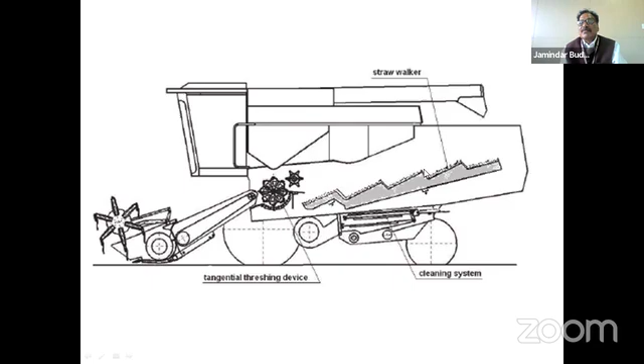And here we find also a winnowing system, that is the fan. It can blow the air and the light particles will fall down. And of course the straw, via straw walkers, will come down. It is the basic function of the straw walker when we see it.

And you see the losses in a combine harvester. The combine harvester mainly shows losses at the cutter bar. The cutter bar losses can be through shattering the plant. So when you don't have a proper reel, you shatter the crop and the grain will fall down. Of course, if the crop is overripe, the moisture content is very low, then naturally the paddy or wheat or grain will fall down from the crop onto the floor, onto the ground.

So that is one problem. That means the moisture content regulating the crop is very, very important - the moisture content, of course, and the variety of the crop. Some crops can withhold with the plant, with the stem and with the ears, and some crops may not be in a position when they get ripe to stay with the plant, and they will fall down. So that is a big loss.

So these are the cutter bar losses, and we also have threshing losses. Threshing losses means when the crop is conveyed through the threshing drum, the ratio should be 2:1. We said 2:1, that means two parts straw and one part paddy.

Based on that, there are some tables, and from those tables we come to know what percent of losses is in the straw. So that means losses in the straw, losses in the threshing unit, and losses with the header - these are the main losses.

Cutter bar losses can be 0.5% to 2%. Cylinder losses can be 0.5%, 1%, and rack losses, meaning straw walker losses, can be 0.4%, and shoe loss, that is the cutter bar down loss, can be maximum 0.4%. We say these losses can be maximum 2%, in the highest position 2.5%, but not more than that.

If that is the case, we are losing. You can imagine India is producing let us say 320 million tons of grains and cereals, out of which each 1% - you can calculate - that is too much. So we cannot bear this. What we can do is minimize the losses so that we can feed our people, we can feed our nation.

That is important - so these are the losses. Of course we have a methodology. In the latest technology, we have a methodology to put global positioning systems. GPS sensors we will put at the threshing drum, at the cutter bar, and at the straw walkers. This we will measure, and immediately based on that it will give signals through that global information system.

It gives the signal to the operator and he will adjust. But the problem in a country like India, where we have small fields, maybe 1 acre, sometimes half acre or 2 acres, when you come to the paddy field you need bunds and all, so you don't travel that fast forward or reverse. So in such field conditions, whether this GPS system works or not is questionable. Of course it will work, but it costs also in terms of technology and all.

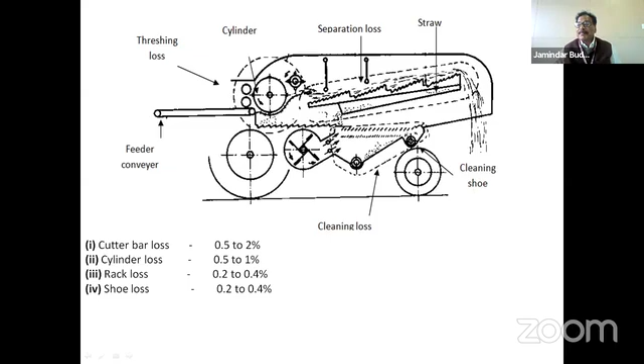My topic today is how we can minimize losses preventionally, not through the GPS system. Since my time is less, I will touch on the important points, and later we can have a discussion.

Let's discuss the cutter bar, this is a John Deere cutter bar. It's a bigger one, maybe a 20 feet cutter bar, used in big countries with big fields. This part is called the reel in technical language. The reel can be adjusted.

The reel can be adjusted vertically as well as horizontally. It is movable front-wise, and can also come back hydraulically, going up and down according to the height of the crop. We need this horizontal movement because sometimes crops are standing, half standing, or falling. Accordingly, we have to adjust the reel properly.

Secondly, the RPM of the reel is correlated with the velocity of the harvester. For example, when we are going slowly and the reel is moving very fast, the threshing will not happen between the threshing drum and concave - it will happen at the reel itself. This means grains are falling partially into the cutter bar unit's stroke, and some grains fall on the ground.

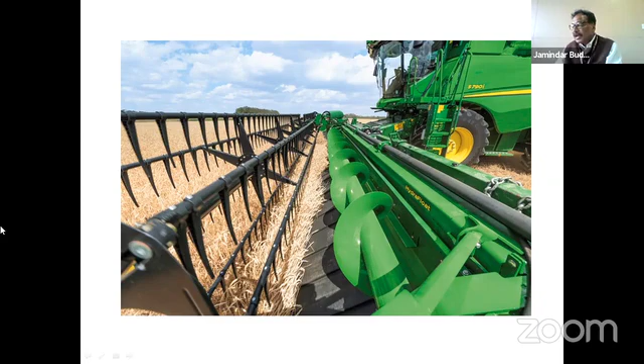That's the problem - you also have to calculate the moisture and the speed of the threshing drum and concave, which all depends on the conveyor chain. So depending on the density of the crop input coming in, you have to harvest accordingly.

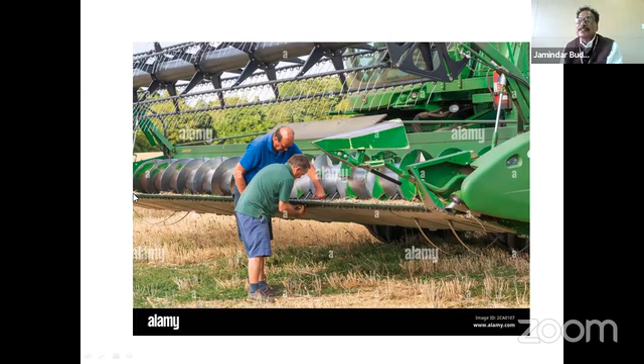There can be losses too. For example, when the cutter bar isn't properly fitted - I'll show you these cutting blades here - if these blades are not properly fitted, the blade may get loose from the bolts and rivets and fall down. If one or two blades fall, that particular width will not reciprocate and will not cut the standing crop, causing losses.

That's a lot of disturbance and losses. So in maintenance, every morning and during noon time, you have to check the blades. If necessary, remove the cutter bar and fit a new one, and while working the machine, you can re-rivet and refit it.

In harvester maintenance, I should tell everyone who maintains, inspects, or manages the harvester that every day before sunrise, one should go to the harvester and start the maintenance job, like selecting this cutter - I'll come to that later. There are many points on how to adjust these things properly, so the machine works functionally with minimum losses. During morning time before harvesting, when moisture is high, we have to take care of such maintenance.

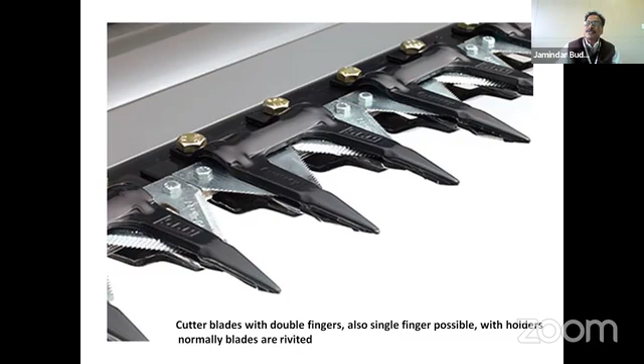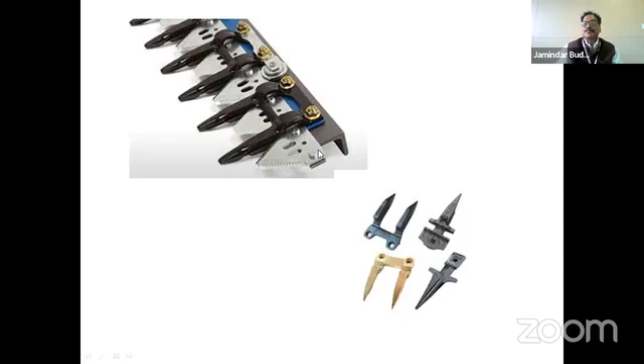These are the fingers - sometimes single finger and sometimes double finger, where the blade sits. This is the passive cutter, and the active cutter is the reciprocating blade. Sometimes for lodged crop, when the crop has fallen down, we use devices like these, called lifters.

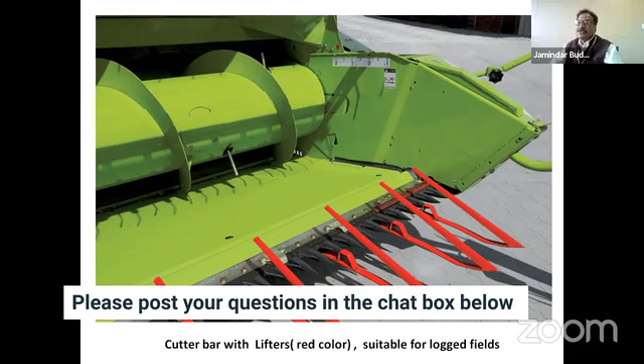We call it lifters, these red ones. Due to heavy rains or wind, crops will fall down. Nowadays, with so many crops growing very high and giving good yielding, through this high yielding the crop can fall down when even a small wind touches it. Such lodged crops can be lifted with this.

In such cases, be careful, losses are more, and you have to drive slowly and work slowly with your harvester. There are so many factors involved.

For example, this is the auger, from the Crop Tiger. This auger has two types of screw, one is the left screw and the other is the right screw. Both screws bring the crop to the middle, and from there it goes to the conveyor chain.

This happens due to regular harvesting. This auger, this screw, is nothing but a thin metal plate, and the metal plate will wear out. When it wears out, the crop will not be conveyed further to the conveyor chain.

In such case, we have a possibility to adjust the auger horizontally so it comes down between the trunk, at a particular place there. Also, sometimes the fingers break, and when a finger breaks, the crop cannot be taken and conveyed to the conveyor chain. Knowing the function of all these things helps us understand such practical issues and minimize the causes.

We can minimize the losses, because every single grain saved is saving the nation. That we should not forget.

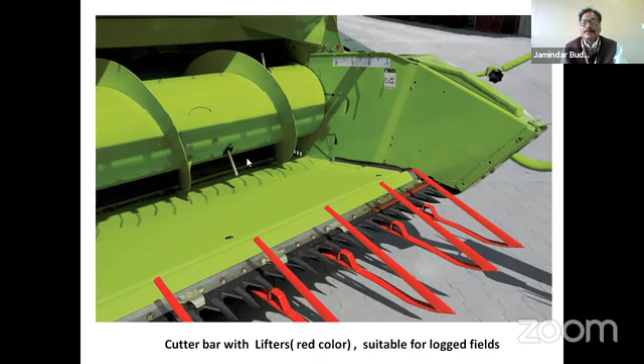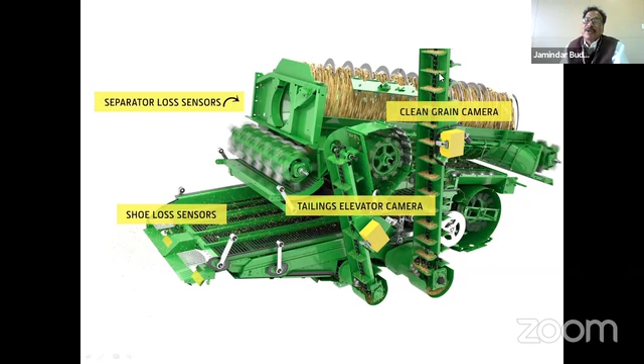As we know, with wheat there is less problem. Wheat is very good, like soldiers, the plants stand and won't fall down. Mostly the wheat crop won't fall down because the crop is not tall, and it's also very easy to harvest wheat.

When you sit on the harvester, we harvested a lot, so many hectares, thousands of hectares of land, during my studies in Germany, and also here as a dealer for the Claas combine harvester in my industry experience. You enjoy the wheat harvesting so much, you like to travel like driving a car.

But you should see, you may go at speed, but inside there, whether the threshing drum and concave and the other cleaning units and aggregates can take the load, we have to think of that.

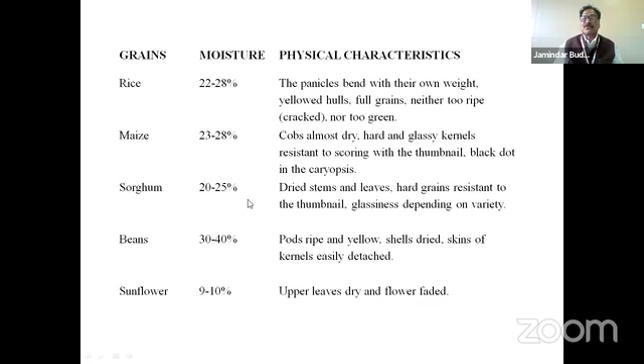So we use this rasp bar for wheat. Here, this is the threshing drum and concave. Whereas for paddy, since the paddy crop's plant is very strong, we use spike bars, we call it spike bars.

It happens time to time that these rasp bars wear out. Once the rasp bar wears out, you have to change it naturally, you will come to know this during maintenance. Normally, you have to replace it every season.

Every season means, let us say 500 hours. Take that as a thumb rule. Every 500 hours, this rasp bar should be replaced.

Before season, you have to replace all these things: important belts, important bearings, welding works, gas works, painting works, tires, tubes. Last but not least, the engine should be in good condition, 100% performing condition. That is called seasonal maintenance.

And the daily maintenance, what you have to do? You have to check the oil levels, check the air level, clean the combine harvester inside because of the moisture. So many parts will collect there, so many small stones, grass, and foreign bodies. Every time, sometimes 2 times. And cleaning of the air filters, we will come to know also.

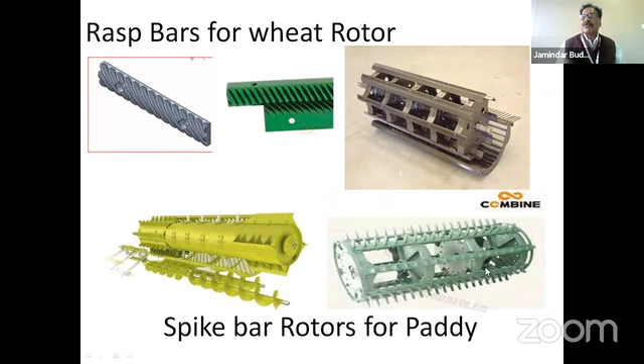This is called the axial tangential flow system, which you will find in the Claas Crop Tiger. This is a regular tangential flow. This is the cleaning system. Once again, this is the grain pan, and this is the flow, and regulating the fan flow is very important.

When you regulate less, what happens? Foreign body will come in. This filtering does not take place properly, and you have foreign body along with the grains that we don't want - we want pure grain. That's why regulating the fan, where we have a flap, we can adjust the airflow and direction, so that air will go from inside and blow out. This chaff and everything will come out. So the importance is regulating the fans - the winnowing system, the complete winnowing system, is very important.

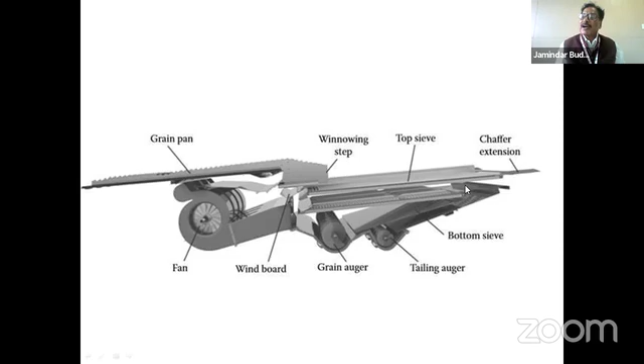Likewise, here these augers - you have a tailing auger, you have a grain auger. These grain augers also will get worn out time to time. Season to season, you have to replace or repair and put it on standby. Why I am telling this - these are all things you cannot replace in the field during harvesting. That is not possible. You have to do it very thoroughly.

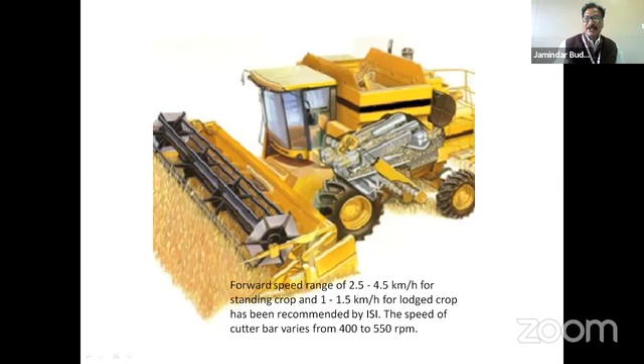Forward speed range should be 2.5 to 4.5 kilometers. For standing crop, and for the lodged crop, almost 1/3 you have to go very slowly. Like for example, when driving a car in the rainy season, the braking distance is 3 times more. So here it's 3 times more in the standing crop, and 1/3 of that only for the lodged crop. Such things you have to think about.

Since my time is short, in another 10 minutes I will complete. My given time is maximum 30 to 40 minutes. This is a huge subject.

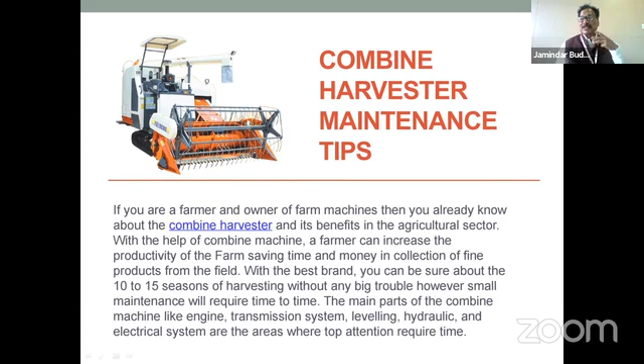The combine harvester maintenance is very important, because when you see the combine harvester, it is not sophisticated like a CNC machine. It is full of metal sheet, full of belts, full of chains, full of drums, shafts, etc. So that means the wear and tear is likely to be more - it causes physical wear and tear, and natural wear and tear. All this we have to protect. Protect with the paint, protect with the oil, protect with the grease, protect with our filters, protect with our radiator, protect with whatever, whatnot - everything.

Let us see, for example, the simple air filter. If you want to protect the engine, air filter is very important - you have to give fresh air inside. Like we breathe fresh air, otherwise we will have to go for a mask. Similarly in the combine harvester, we will find a lot of dust. During the summer, we will harvest a lot of dust. This will catch the dust.

You have to just knock it like this with this edge, or you can use a compressor air. Take care, it will damage the skin of the filters. Very slowly we have to do it from in to out, not from out to in - from in to out. So the dust will come out like this.

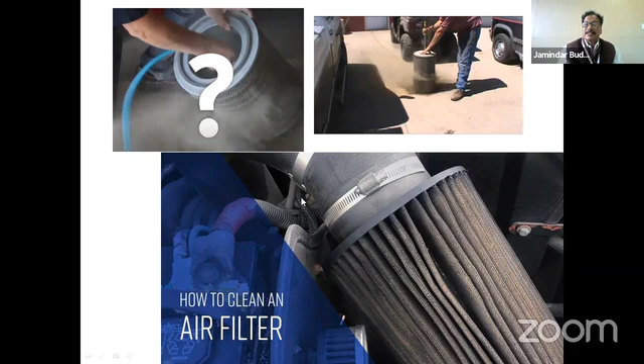Normally what we do during the harvester season - a day twice, thrice, or 4 times we will change the air filters during harvester time. That is important. That means you should have a standby 1 or 2 sets - just remove and keep it there. When the machine is working, you can clean it. So you should have a blower, a compressor blower. These are all things you have to adjust. Earlier we have seen this slide, adjusting the blades, and of course greasing all the nipples.

There are so many nipples, so many moving parts in the combine harvester. You grease regularly, because if some bearing breaks, it causes the efficiency of that element to drop, and it will damage the crop, and you will have a lot of losses. To minimize the losses and minimize the harvesting time, proper greasing and lubrication is very much important in the combine harvester.

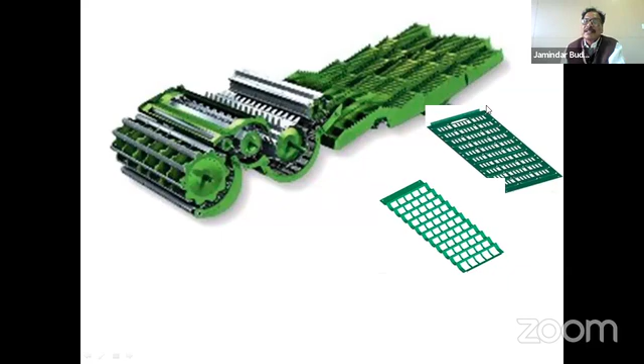So here is one blade, and for example, here is the straw walker, covered with plates 1, 2, 3, 4 like this. Due to high moisture content, small green pieces and chaff will block this. When it gets blocked, naturally the straw along with the grain will fall down outside. There is a huge loss. The farmer will cry, so we will cry too - that is a loss for our nation. We cannot accept that, so we must be sure these straw walkers are properly cleaned, and also the concave, which will also get blocked by moisture content and green grass.

And sometimes it may break - some small stones will come inside, and some small animals also come inside during harvesting. So this concave has to be protected. That's why before the concave there is what we call a stone trap, where you collect all the stones. Remove those stones on an hourly basis, or twice or thrice daily. Otherwise, if the stone trap gets blocked, the small stones go inside, and the concave and crushing drum will get damaged, causing further consequent damages.

Yeah, these are the important parts. When you see it once, each and every part is very important, particularly the selection of the sieve. The selection of the sieve is very much important. Why am I saying this? Because the sieve hole diameter depends upon the crop variety - we should not forget that.

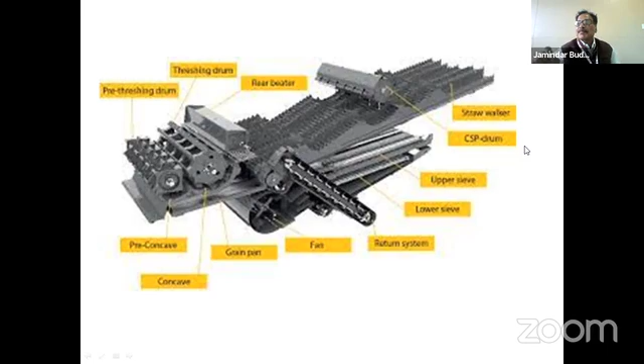We cannot simply put in a GPS system and leave it to computer calculation. Okay, that is very good, it saves time and everything - we welcome that. But at the same time, we should know the function ourselves and keep the machine in order. We should keep the machine clean, and keep it in conditions that minimize loss. That is very much important.

Yeah, this is the flow. When you see that flow, it is really like a carpet. Though this is a graphical photo, in real life also you will find the same - we don't have time to look at videos and all. I know many of you here are experts, professors, students, and farmers in this meeting. I'm very happy to speak in front of you.

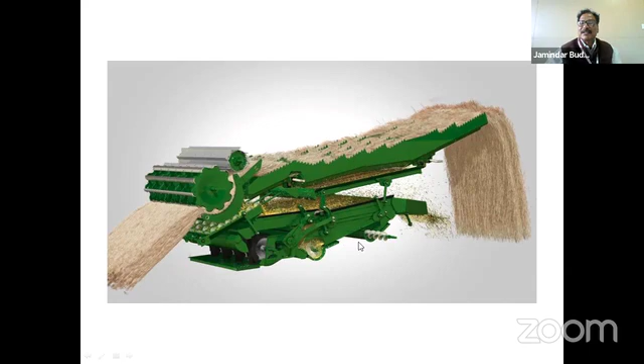My guru used to say, I am a student, I am not a professor. My guru, Nakra sir, used to say this because we have to keep learning. I am here to learn with you. You can share your experiences with me about combine harvesters, how to minimize losses, because the subject is endless. Nobody is perfect here - even after 35 years of experience in this field, we are still ready to change and adopt new methodology.

So this is a tangential flow system. Here you won't find a straw walker. This is mostly in CLAAS combines, and in Western countries you will find such combines. For straw, since it is very aggressive, it's not that advisable. But for wheat, barley, rapeseed and others, this is good. So everywhere you will find losses - that means there are interrelations and correlations.

Even in the conveyor chain, when you are giving the crop through the conveyor chain, if the chains are loose, the crop cannot pass easily. If the chains are tight, the harvest will shell the skin of the paddy. So these adjustments are all very important.

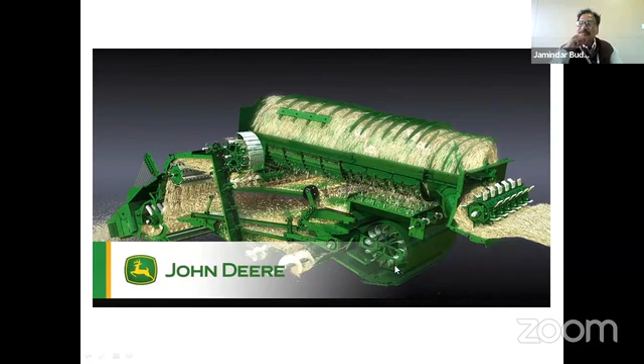That's why I won't go into all these points about the conveyor chains. Simply, I will say you have to do daily maintenance. Every morning, minimum 2 hours, every combine has to do light water control, oil control, nut and bolt tightening, and checking all belts. See, the combine is full of belts and chains.

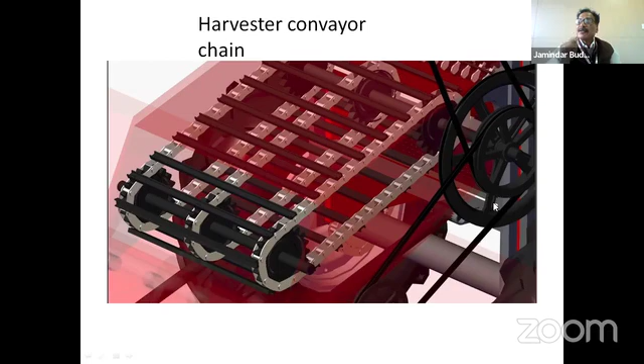This belt tension should be taken care of, and chain tensions should be taken care of too. If the belts break, that cost may be only 100, 200, 300, or 500 rupees, but the problem is replacing the belt may take 2 hours. In 2 hours, with a small harvester you can harvest 1 hectare easily, and with a big harvester, 2 hectares - that means 4 or 5 acres of land. So we cannot afford to waste our time there.

So if you have a doubt in the morning that a belt will not work, during the daily maintenance you have to replace it. If you have a doubt with the chain, you have to replace it, repair it, and fix it.

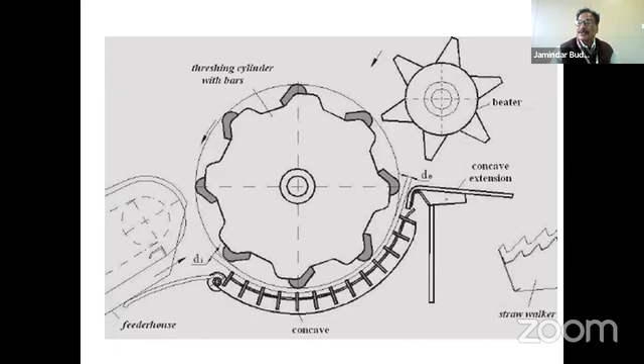So your aim should be that from morning to evening, from Monday to Sunday, and through the complete season from start to end, the machine should work freely with minimized losses, with minimum breakdowns, with better engine efficiency, and with better fuel consumption. All these factors, through the complete season, only then can the farmer be happy, the operator be happy, the machine owner be happy, and the nation be happy.

Because unlike our car engines, you cannot go on changing the engine speed in a combine. The combine engine always runs at the highest RPM, say for example 2500 RPM, it runs always. There should not be slippage, and there should not be further slippage with the belts and consequent transmissions.

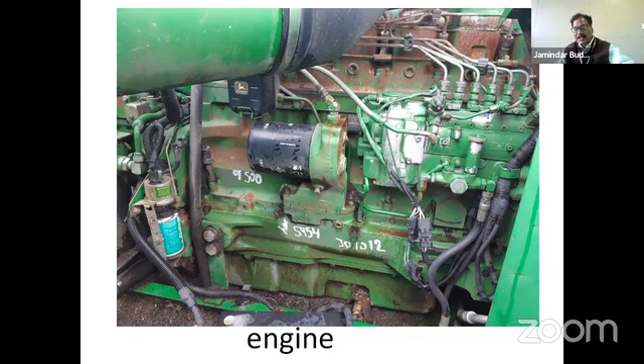So once you get the basic transmission from the engine, you should ensure all belts get the given RPM accordingly. The straw walker has a certain RPM, the fan has a certain RPM, and the threshing drum has a certain RPM, because according to the crop condition, the threshing drum has a variable drive - it can be either hydraulic or mechanical. With the variable drive, you can adjust the RPM of the threshing drum.

So this all depends on you having a good, well-performing engine. That's why in maintenance, from season to season, you have to thoroughly overhaul the engine and keep it in good working condition. You cannot afford to have your engine damaged during the season - it may then work with low efficiency.

We cannot accept that, because when the engine works with low efficiency, it affects the chains, belts, and all the dependable transmissions in the combine. Starting from the cutter bar, you have wheel transmission, auger transmission, conveyor chain transmission, cutter bar transmission, threshing drum transmission, fan transmission, sieves transmission, straw walker transmission - brake, clutch, everything. All of these depend upon the belts, because with belts it's easy, whereas with levers you cannot do it.

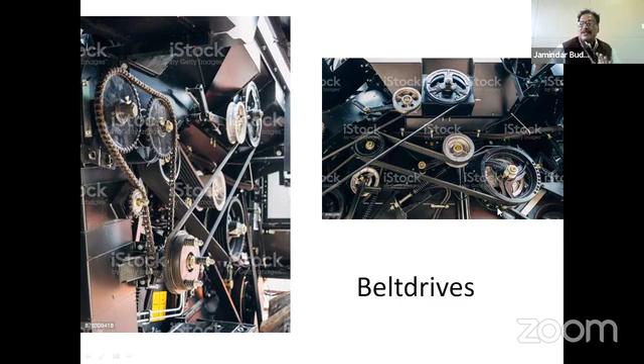The chains should be kept in oil, like that. The belts should be removed and kept in a shadow place, otherwise the belts will lose their elastic power. All these factors ultimately minimize losses and ensure smooth running of the harvesters.

Now we have thousands of harvesters in India. From Punjab, Haryana, West UP people, the mechanization took place in the entire India.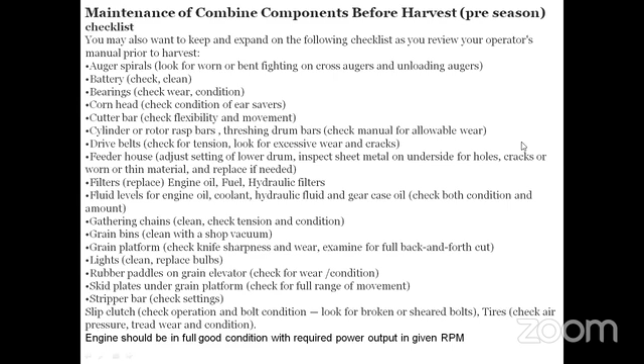Yes madam, with this I want to conclude. Of course there are so many factors, maybe some questions are there. This is the demonstration of the different harvesters. Thank you, madam, for giving me the opportunity.

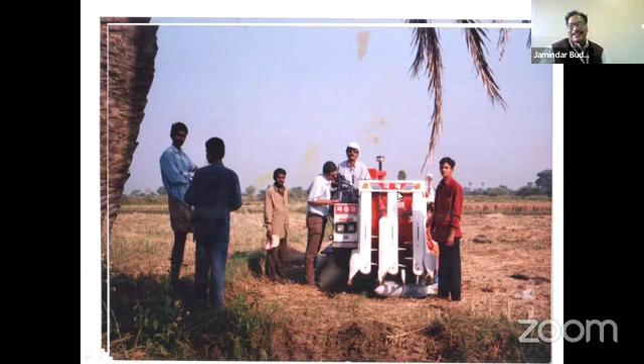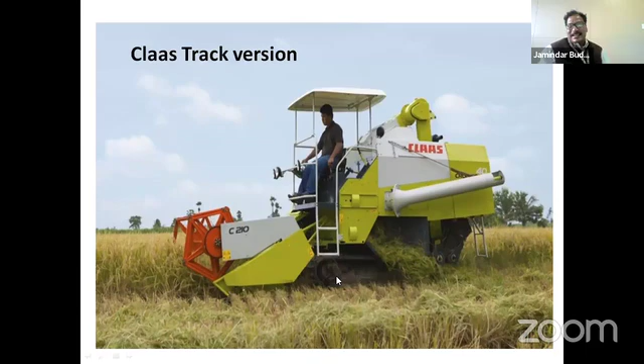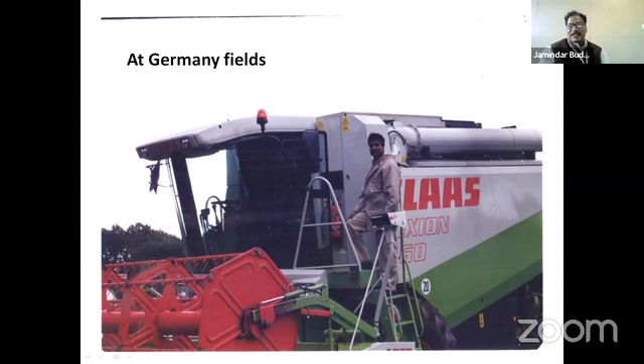Okay, nice. Thank you. Thank you very much. Okay, thank you very much, sir.